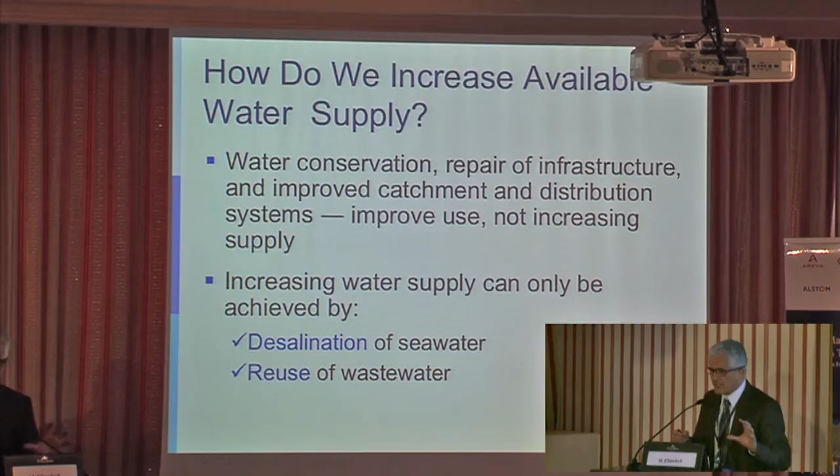Of course we can do all the usual things we were always told: water conservation, repair of infrastructure, improve catchment. But all of these will only improve the use of water—they will not give you more water than what you can get from the hydrological cycle. The only way to get more water is to turn to engineering and either desalinate seawater, since we have plenty of seawater, or recycle all the wastewater.

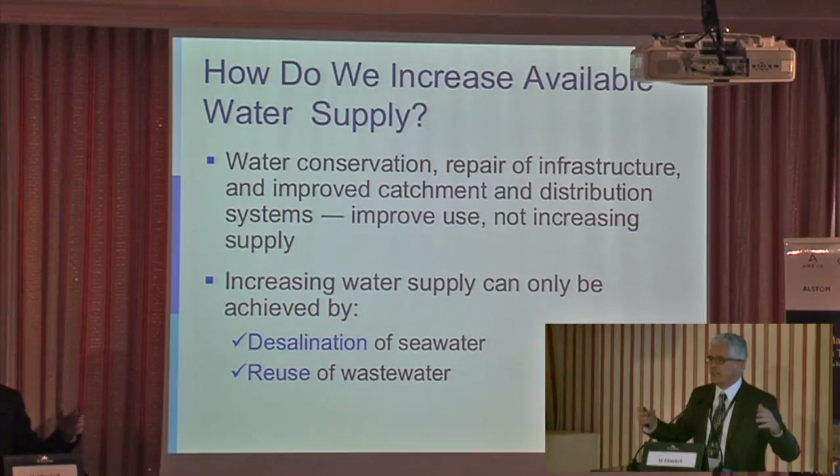This is done in many countries—Singapore, US, Israel—they recycle all their wastewater and use a lot of desalination. So I will focus only on desalination and talk about some of the technologies.

Now, desalination also got a lot of coverage by high-profile magazines like Science and Nature, which dedicated special issues to water and desalination, and the US National Academies also wrote a big report about desalination, asking if it can really be a solution to global water scarcity.

The main technology nowadays for desalination is reverse osmosis. This is the predominant technology for all new desalination plants, except in some Gulf countries that still have thermal desalination, which is more energy intensive.

When you talk about agriculture, the post-treatment that is very important is to remove boron and some chloride, because boron is not rejected well by these membranes. If you have a high level of boron, it's not good for many crops in agriculture. So boron and chloride need to be removed, and this can be quite costly, the extra polishing.

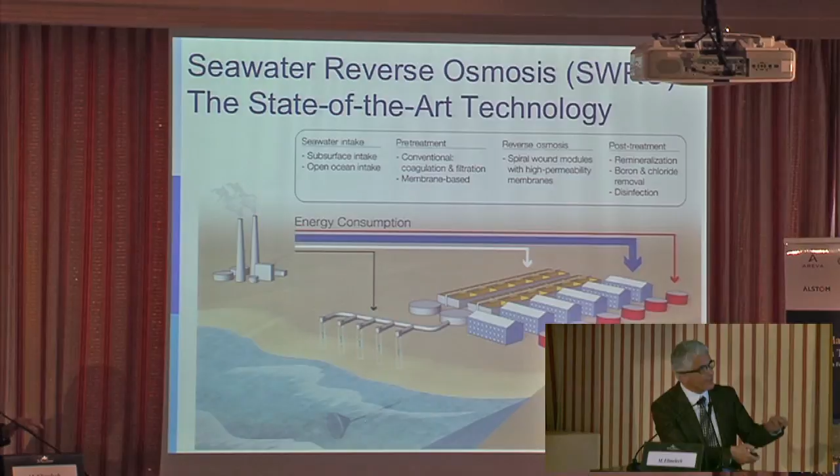So just a few words about desalination before getting in depth. It offers seemingly an unlimited steady supply of water. The ocean is vast, you'll have it all the time. Also, it can produce water without impairing the natural ecosystem. If you take water from rivers and lakes, you can affect the ecosystem, since that ecosystem needs that water. The ocean, whatever you take, it's just like one drop, insignificant.

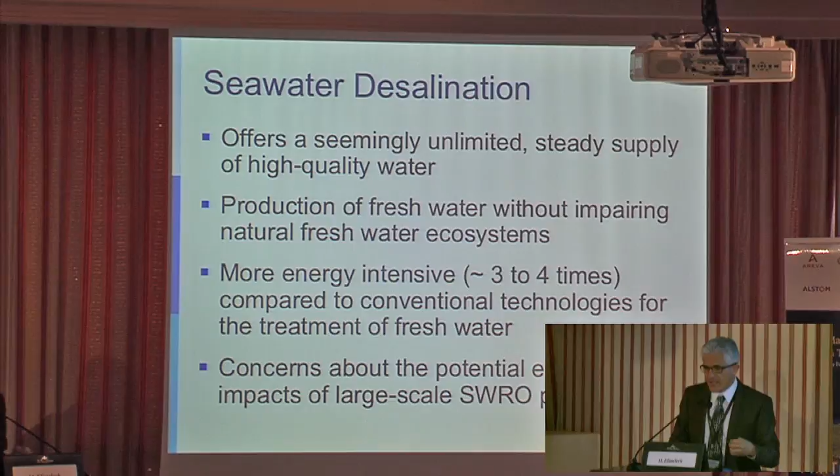However, and this is what I will emphasize, it's much more energy intensive. It takes about 3 to 4 times more energy to desalinate than the way you treat water. For example, the water that is treated from the river in Rabat and comes to your tap water is about 3 to 4 times less energy. And there are some environmental concerns about desalination.

So I wrote a review article about a year ago that covered some aspects of seawater desalination. Here I will highlight only a few things and add some newer things. And I know Robert told me that he read this article just before I came here, which is good. So I would like now to pose two main questions.

What is the current energy efficiency of desalination, and how can it be improved? We really need to understand what's the limit, or thermodynamic limit, of desalination. Because someone can come to you and say, I can do desalination with 0.1 kilowatt hour per cubic meter, and you believe him or her. It's not the case. There is some limit that you cannot violate, and it's based on thermodynamics.

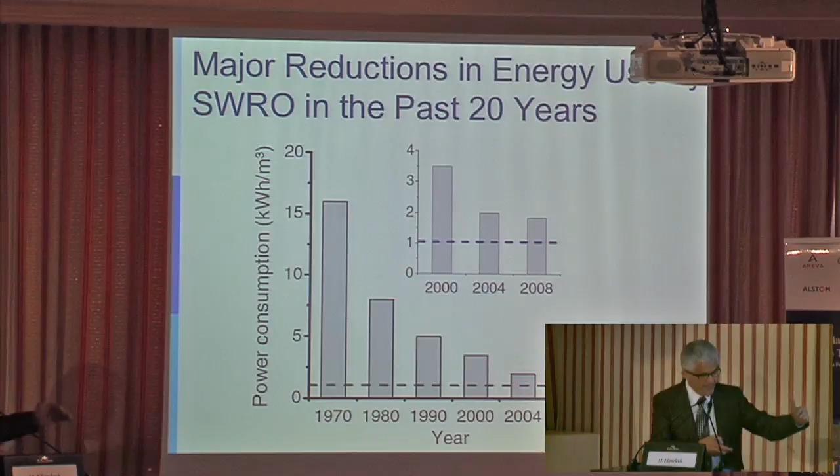This is the thermodynamic limit that I'm going to describe very soon. Most of the improvements were done due to better systems, better energy recovery systems, and better membranes. But you reach now a limit that you cannot improve further, and you are very close to what we call the thermodynamic limit of desalination.

So this is what I would like to say a few words about. From thermodynamics, you can calculate how much energy is required to separate water from salt, and you cannot do it with less energy. This is what thermodynamics dictates. This is the limit. So if you take seawater at 35,000 ppm, and you take just one drop of water from the seawater, you will need 0.76 kilowatt hour per cubic meter.

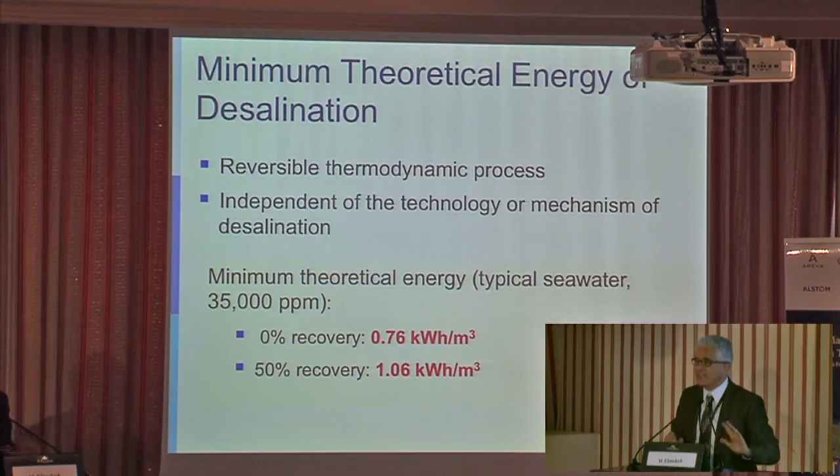Now, most desalination plants work at 50% recovery. It means for each volume of water, you'll get half clean water and half becomes concentrated. For this, thermodynamics tells you cannot do it for less than about 1.1 kilowatt hour per cubic meter. It's impossible—even if you invent the most advanced process, you just cannot. And it's independent of the process, it's just based on thermodynamics.

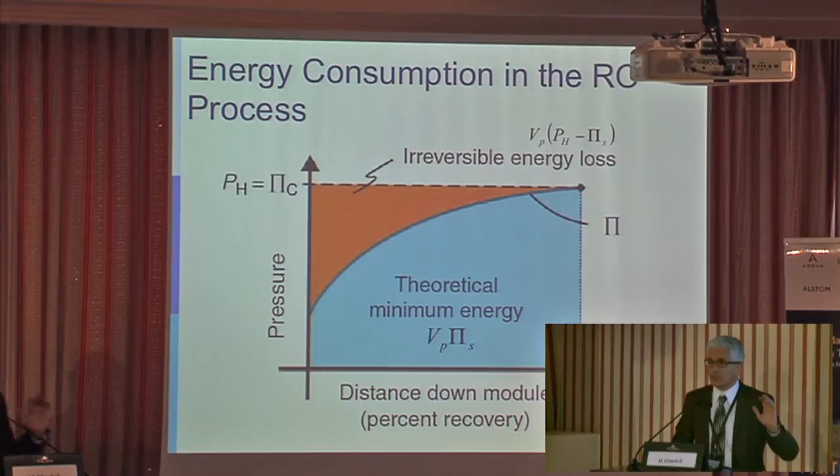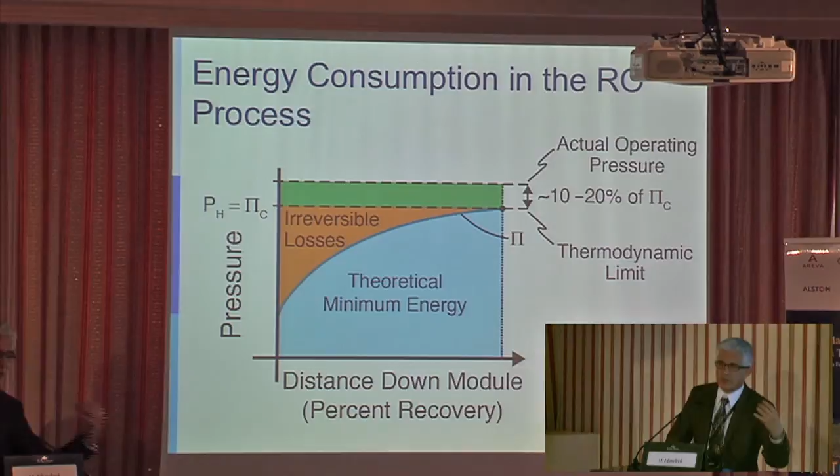So you cannot operate the reverse osmosis with less pressure than this osmotic pressure at the exit. You must apply this pressure, otherwise water will not come out from some part of the membrane. Remember this part, because we will talk about it when discussing how much we can improve desalination. In reality, you apply a little more pressure because of the frictional drag as water flows in the channel—there's some friction and energy losses, so about 10 to 20% more. This is the way you operate. If you operate at less pressure, you will not be able to squeeze water through some areas of the membrane. So remember this part.

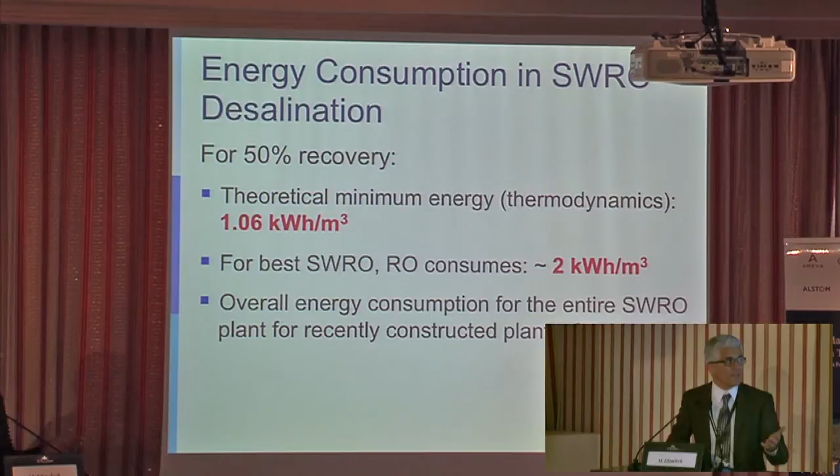Now let's summarize the values. The minimum energy by reverse osmosis is about 1.1 kilowatt-hour per cubic meter. The best desalination plants built nowadays, like in Singapore, Spain, and Israel, operate around 2 kilowatt-hour per cubic meter just for the reverse osmosis stage. However, when you look at the entire energy consumption of the desalination plant, including pre-treatment and post-treatment, it's about 3 to 4 kilowatt-hour per cubic meter. So the RO itself consumes about 2, the rest of the plant brings it to 3 to 4, with the remainder coming from intake, pre-treatment, and often post-treatment.

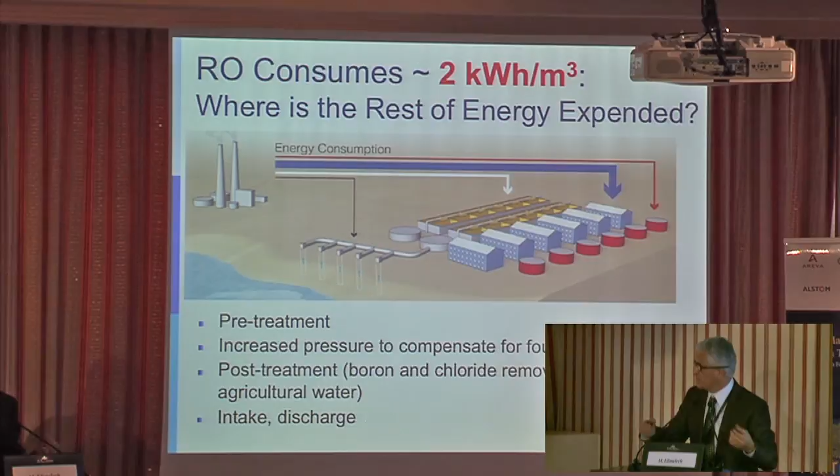To remove boron after the desalination stage, sometimes you need another reverse osmosis stage, or even two, otherwise you cannot use the water for agriculture. And this is very important - desalination is becoming a source of water for agriculture. Like in Spain, and I heard now in Agadir, Morocco, they're building desalination plants for agriculture, and the same in Israel, where it's used for agriculture.

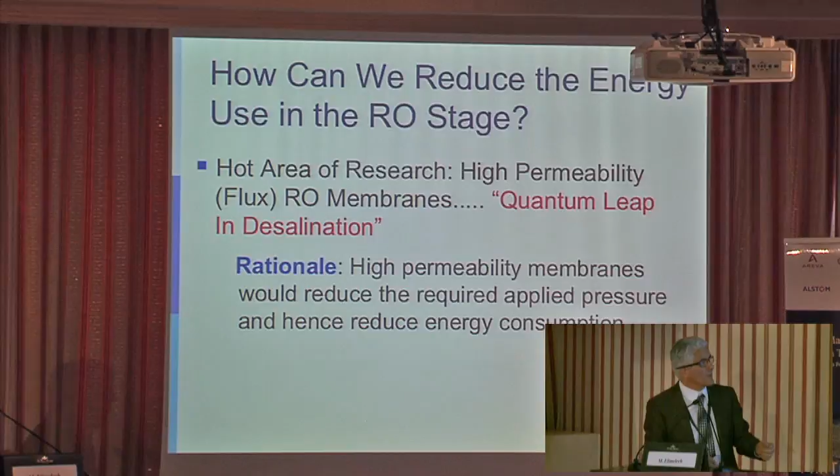So now that we know roughly the energy limit of desalination, let's see how we can improve it. There was a lot of research suggesting that if we get better materials, we can make desalination much more energy efficient, and I'd like to tackle this problem. One of the hot areas of research until recently was what we call high permeability membranes. They promise that if you make a membrane with high permeability, meaning water goes through with almost no resistance, you get a quantum leap in desalination - saving a lot of energy, making desalination as cheap as treating river water.

Some areas of research went into two directions. One is aligned carbon nanotube membranes. Through simulation they found that if water goes through carbon nanotubes, there's no friction because the nanotubes are smooth and hydrophobic, so water flows with no friction. You can get very high permeability, and they claimed that using this in desalination would require almost no energy. The same idea came from biologists - aquaporins, these water channels known to pass water at very high flow rates, were suggested for incorporation into membranes to get high permeability and reduce desalination energy.

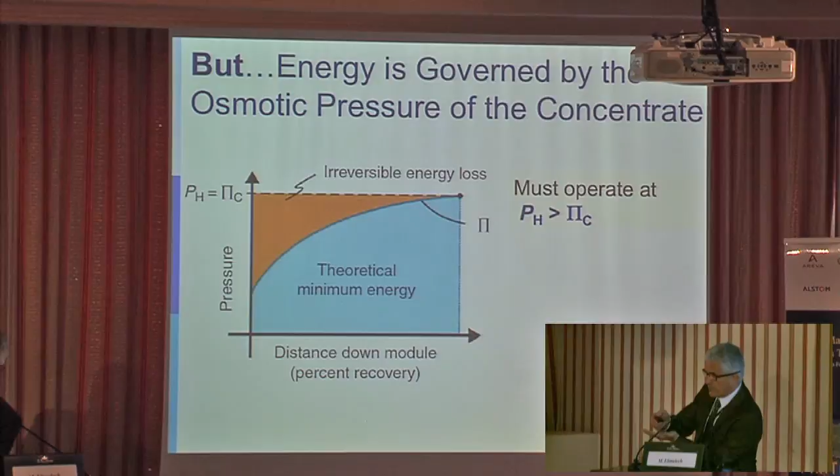But I would argue that's not the case, because the transport of water through the membrane is governed by thermodynamics, not by the resistance of the membrane - because of what I explained. You must operate with at least this pressure to get any water out, due to the osmotic pressure of the brine as it accumulates in the membrane channels. You also need about 10-20% more to compensate for concentration polarization and frictional drag or pressure drop. It turns out that current membranes already operate in just about this range. So if you have a high permeability membrane, you won't use less pressure, and energy is just proportional to pressure. You cannot desalinate with less pressure than this, and current membranes already achieve it.

So this high permeability membrane - even though it hasn't even been demonstrated that it can desalinate - even if it existed, it would maybe just reduce the membrane area needed for desalination. But the membrane is only 5% of the total cost of desalination, so it's not significant.

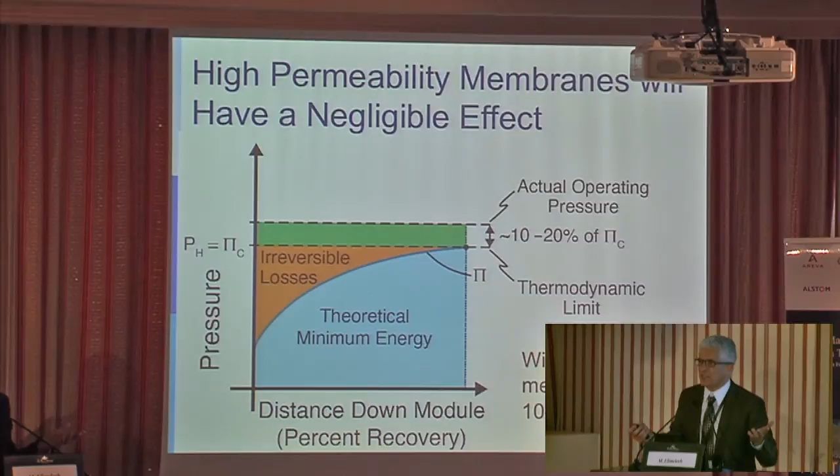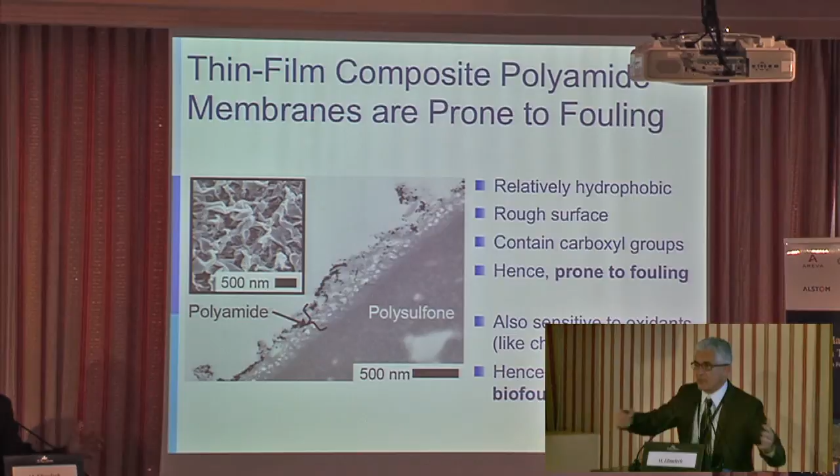Now, the state of the art in desalination are thin film composite polyamide membranes. They are very permeable and selective, retaining 99.9% removal of salt - so they retain more salt and get very high water permeability. However, there are many properties that make them prone to fouling. Fouling is the process when substances in the water attach to the membrane and affect its performance, like organic matter and particles that accumulate and foul the membrane, making it less permeable.

Because they are hydrophobic, they have rough surface, they contain carboxyl groups, many of them, and also they are sensitive to chlorine and oxidants. So many of these properties mean you will not be able to clean them effectively. They will foul, and once you have fouling of the membrane, you need to increase the pressure to squeeze out the amount of water that you want.

So I would argue that really the improvement of high permeability membranes will not improve the energy of desalination, because of what I explained.

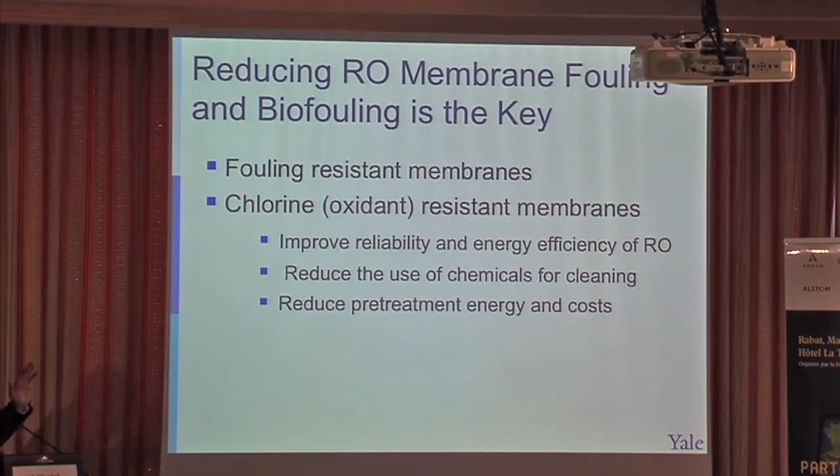What you really need is fouling resistant membranes, because the current membranes are prone to fouling, and also membranes that can tolerate oxidants like chlorine. The current polyamide membrane, if exposed to chlorine, will degrade and not perform well. Now, membrane companies and scientists have tried for the last 30 years to find a better membrane than this polyamide chemistry, and they cannot come up with something.

Whenever you come up with something that gives a little more flux, it cannot reject a lot of salt. So the future is really in making fouling resistant membranes, and all these nano-type membranes will not reduce the energy of desalination.

Now, again, my original topic title was forward osmosis desalination. And the second question that I posed: are there any technologies that can reduce the energy demand? I've talked only about reverse osmosis technology so far.

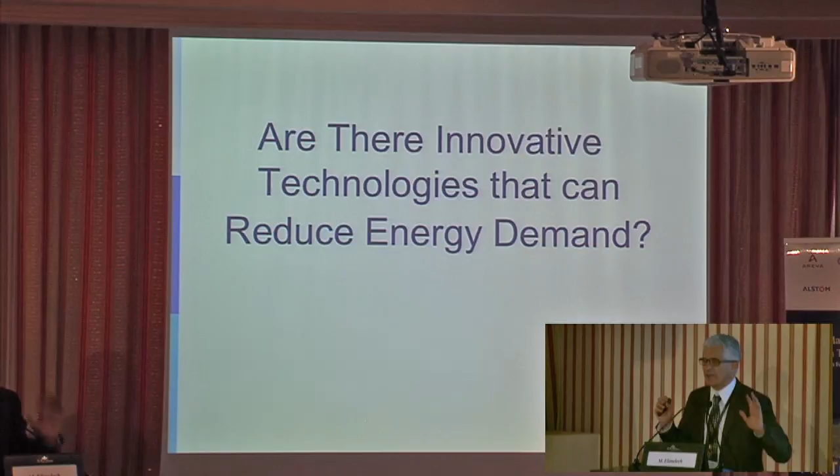The other technology used in the Gulf countries is thermal desalination, where you practically boil the water, condense it, and use it again and again. They are very energy intensive, so they will never be able to compete with reverse osmosis. But those plants were built many years ago, and the new plants built now almost all around the world use reverse osmosis technology, including the recent one built in Agadir, Morocco.

So I'd like to highlight the process that we've been working on and conceptualizing at Yale University. It's called forward osmosis, and we are testing whether we may be able to save some energy in desalination.

The principle of forward osmosis is that you have a membrane. On one side you have seawater, and on the other side you put a solution of higher concentration, and water will move by osmosis to that side. But again, you don't do much here because you're taking water from the salt water and putting it into another salty solution, although it's a clean solution. Then if you can find some way to recover the fresh water that passed through and reuse the salt solution again, it will be a viable process.

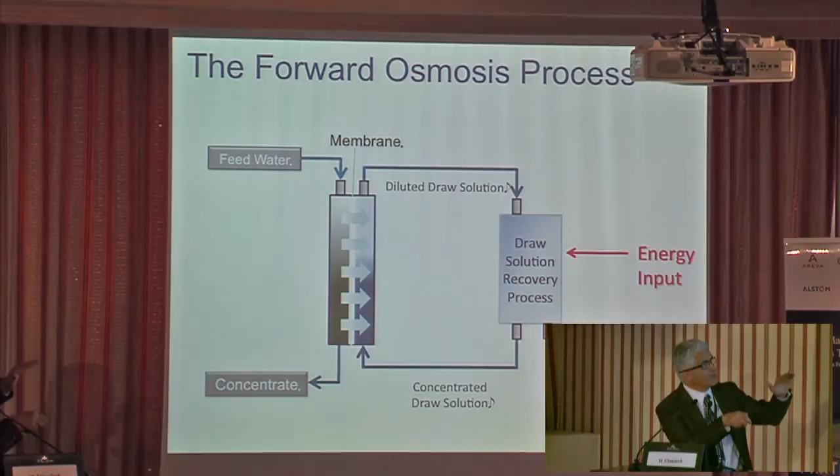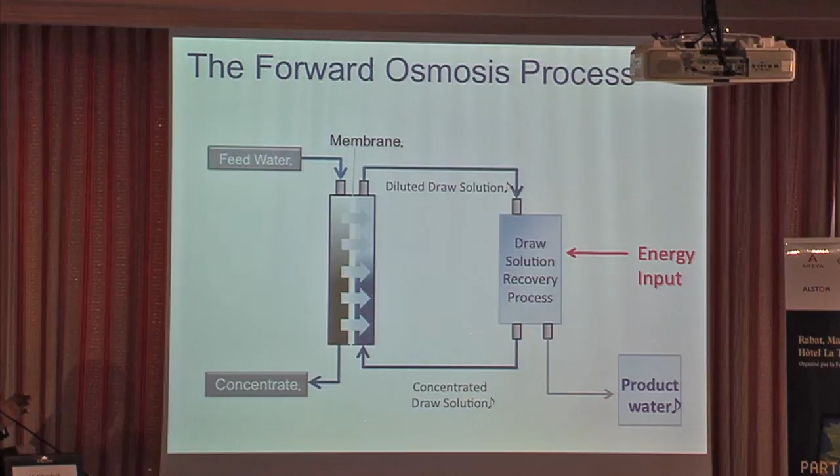And this is where all the energy comes in: the process of recovering the clean water that passed through the membrane and reusing the high concentration salt solution again. So now we need to come up with some clever solution for this salt, otherwise if you need to use another reverse osmosis step to separate it, you will not save energy.

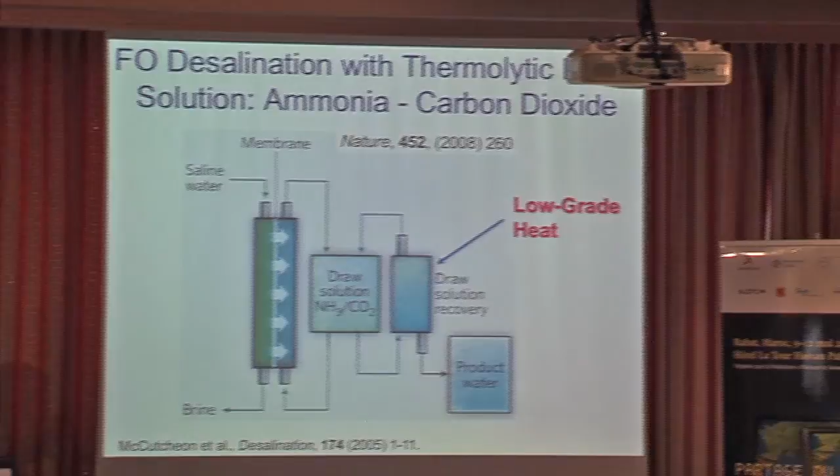So we came up with something we call thermolytic draw solution. These are solutions that, if you apply some heat, you can decompose into something else. For example, our solution uses ammonia and CO2, and I'll soon show you how it works with some animation - hopefully it won't be affected by the conversion to Mac.

This draw solution will draw water from the forward osmosis side, and you only need low-grade heat. At atmospheric pressure, around 58 degrees Celsius, you'll be able to break the solution apart again and get the fresh water. Let's see how it works.

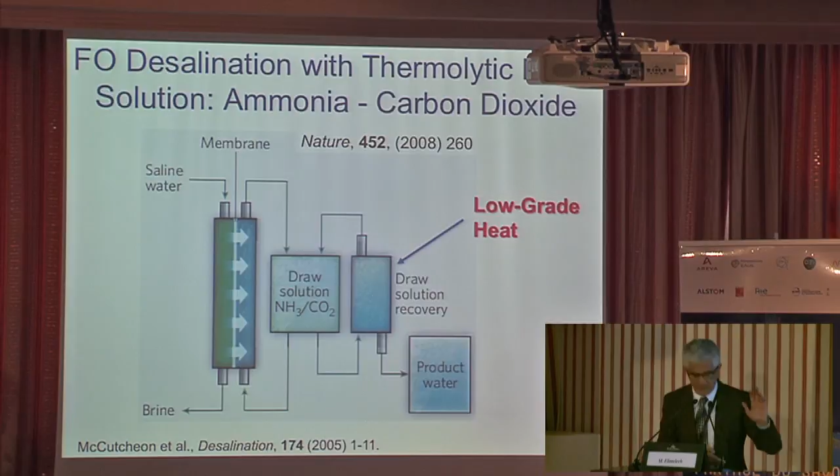As I said, if you dissolve ammonia and CO2, you will get ammonium salt - three types of ammonium salt - and you can create very, very high osmotic pressure. This can draw water across the membrane because it has higher osmotic pressure than the seawater.

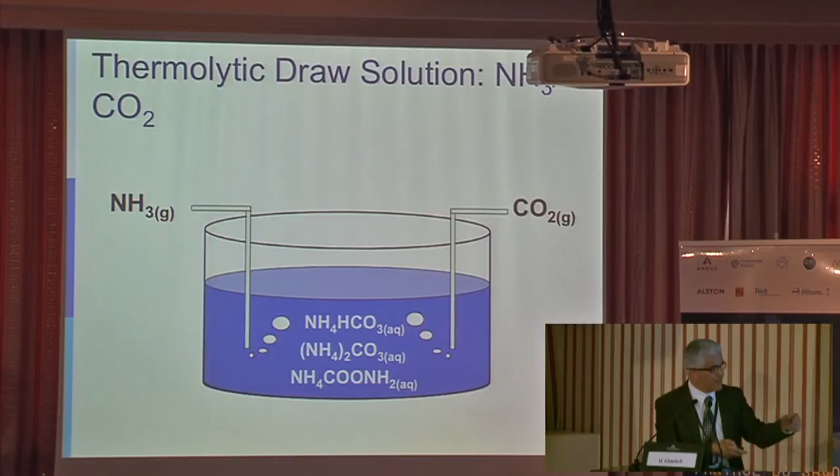Then, as I indicated, if you apply some low-grade or waste heat that otherwise you cannot use, you can decompose them back into ammonia and CO2, use them again, and are left with fresh water. Now, if you calculate the energy here, it will be much, much more than reverse osmosis, because thermal processes are not as efficient.

However, the cost will be insignificant, because if you use waste heat that otherwise you cannot do anything with, it doesn't cost a lot. The electricity you need here, just for the pumps, will be maybe about 0.5 kilowatt hours per cubic meter at most - much less electricity, as long as you have this waste heat, which can come either from a power plant or an industrial plant that would otherwise discharge it to the environment.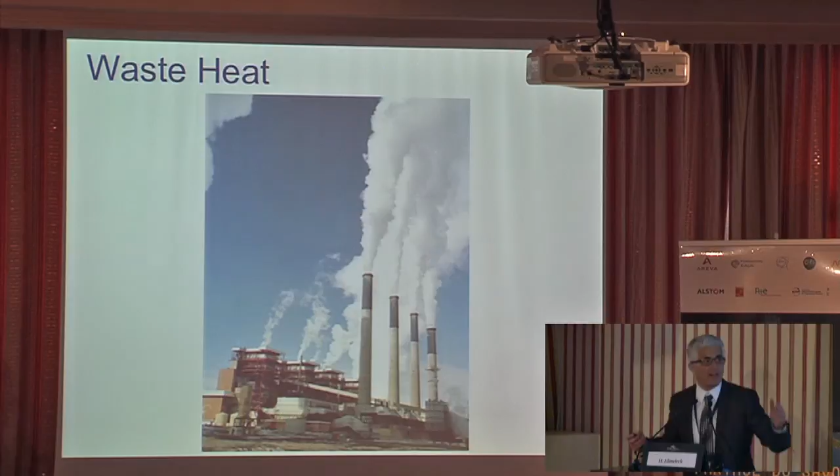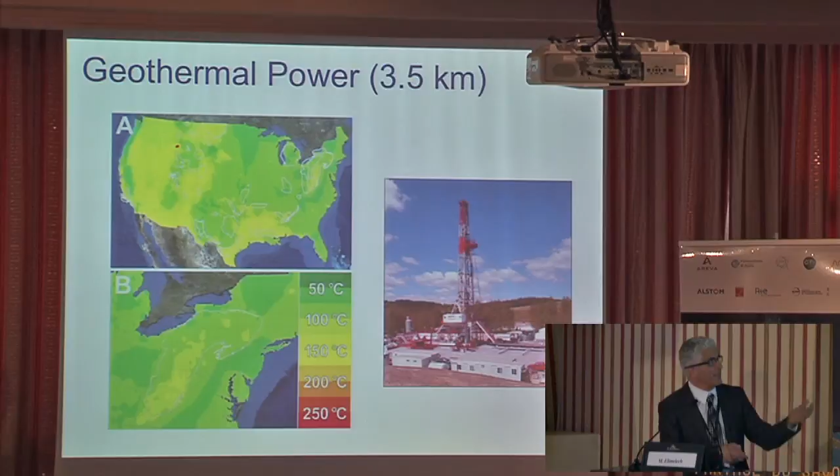You can also have geothermal. This is just a map I use for another paper we are writing, but if you drill 3.5 kilometers, this will be the temperature you can get there. It's about, for most of the United States, 50 to 100 degrees, which is good enough for this process. Some places in the Western United States, you can get much higher. This is the area of Pennsylvania.

The reason we did it is because of this idea of forward osmosis. Now there is a company who commercializes it and tries it on this water that comes from shale gas production. When you produce shale gas water, you get waste of very high salinity. It can be 5 times more than seawater, and you cannot treat it by reverse osmosis. The only way you can treat it is by this kind of process that needs thermal energy.

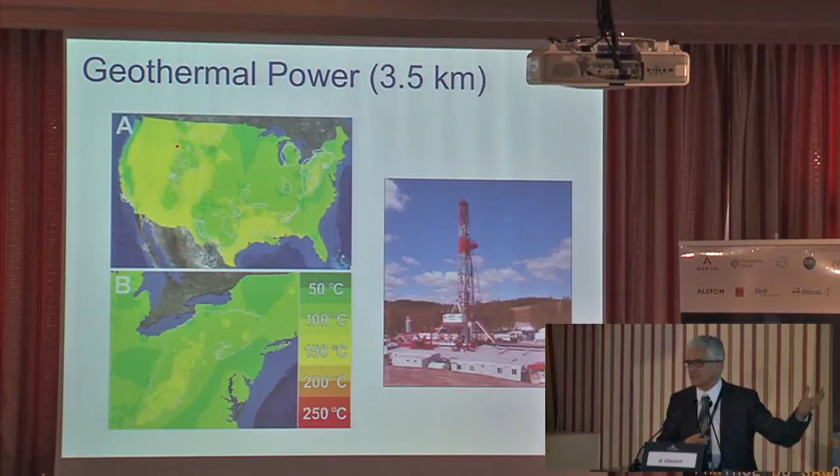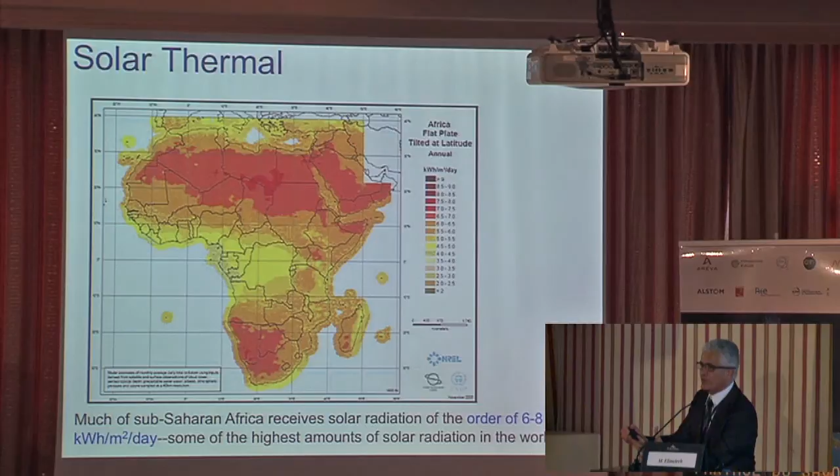Or you can use just solar thermal, and we had an excellent talk here from Total on solar thermal. Again, this is in sub-Saharan Africa. It's plenty. The average there is in the order of 6 to 8 kilowatt hours per meter squared per day. In principle, you can think about this kind of reverse osmosis, forward osmosis. You need more like a decentralized, small unit that can supply water just by using thermal energy.

So anyway, I would like now to conclude with some recommendations, and these I took directly from the Science review article that we have written. These recommendations were mainly, when we were invited to write this article by Science, they wanted us also to say, okay, is it really a sustainable solution, or do you really recommend desalination as the way to solve our global water scarcity? So these are the recommendations we made at the end of this relatively scientific article, and I'm quoting them directly.

So the first one: although several options currently exist to augment freshwater sources, including the treatment of low-quality local water, water recycling, and water conservation, these options alone will not be enough to meet the need. So you can do all the things, but you still need water in many, many places, including North Africa, California, the Middle East, and so on.

Because some environmentalists in the US, they said no way, it's more like a resistance to nuclear or hydrofracking. No way desalination is too energy intensive, and you will contaminate the ocean and everyone will die, and so on. So now, while seawater desalination must be considered after all other options have been implemented, it should be viewed as a crucial component in the portfolio of water supply options.

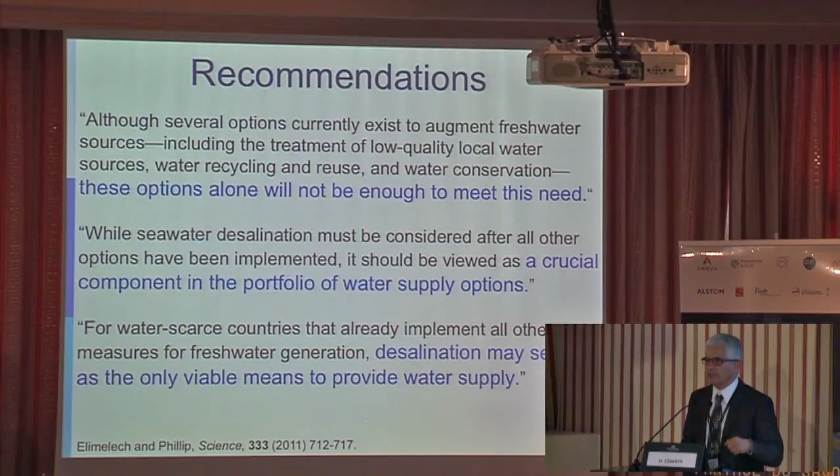Now here, I talk mostly with application to the developed world. Again, if applied completely to the developing country, probably not, but anything in between, it's suitable. And indeed, you hear many countries now building desalination plants - Algeria, Morocco, China, and so on. So it's become really a global solution.